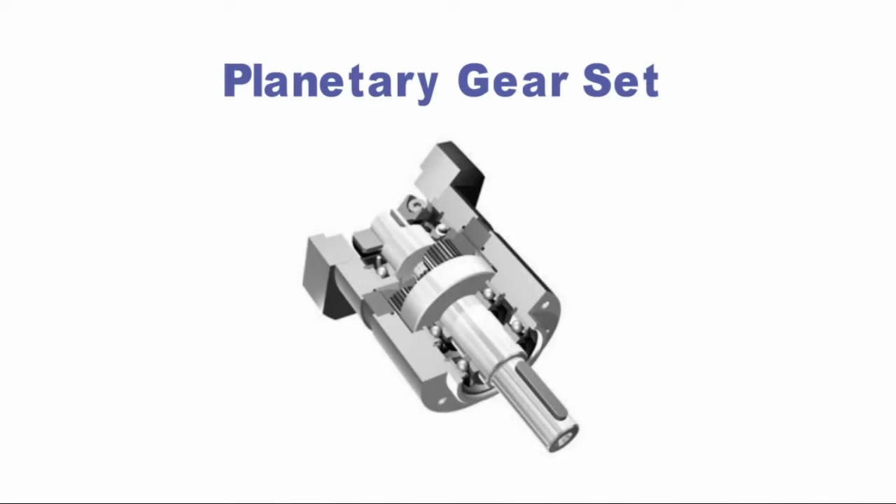Planetary gearing, with its inherent inline shafting and cylindrical casing, is often recognized as the compact alternative to standard pinion and gear reducers. Being suited for a wide range of applications, from electric screwdrivers to bulldozer powertrains, these units are strong contenders when space and weight versus reduction and torque are chief concerns.

The arrangement. The most basic form of planetary gearing involves 3 sets of gears, with different degrees of freedom. Planet gears rotate around axes that revolve around a sun gear, which spins in place. A ring gear binds the planets on the outside, and is completely fixed.

The concentricity of the planet grouping with the sun and ring gears means that the torque carries through a straight line. Many powertrains are comfortable lined up straight, and the absence of offset shafts not only decreases space, it eliminates the need to redirect the power or relocate other components.

In a simple planetary setup, input power turns the sun gear at high speed. The planets, spaced around the central axis of rotation, mesh with the sun as well as the fixed ring gear, so they are forced to orbit as they roll. All the planets are mounted to a single rotating member, called a cage, arm, or carrier. As the planet carrier turns, it delivers low speed, high torque output.

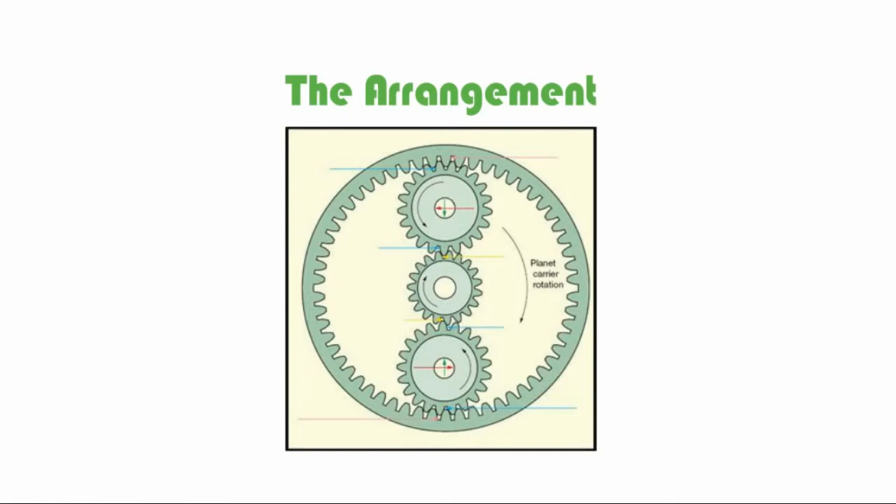Planetary gearing. Planet gears, for their size, engage a lot of teeth as they circle the sun gear; therefore, they can easily accommodate numerous turns of the driver for each output shaft revolution. To perform a comparable reduction between a standard pinion and gear, a sizable gear will need to mesh with a rather small pinion.

Simple planetary gears generally offer reductions as high as 10:1. Compound planetary systems, which are far more elaborate than the simple versions, can provide reductions many times higher. There are obvious ways to further reduce speed, such as connecting planetary stages in series. The rotational output of the first stage is linked to the input of the next, and the multiple of the individual ratios represents the final reduction.

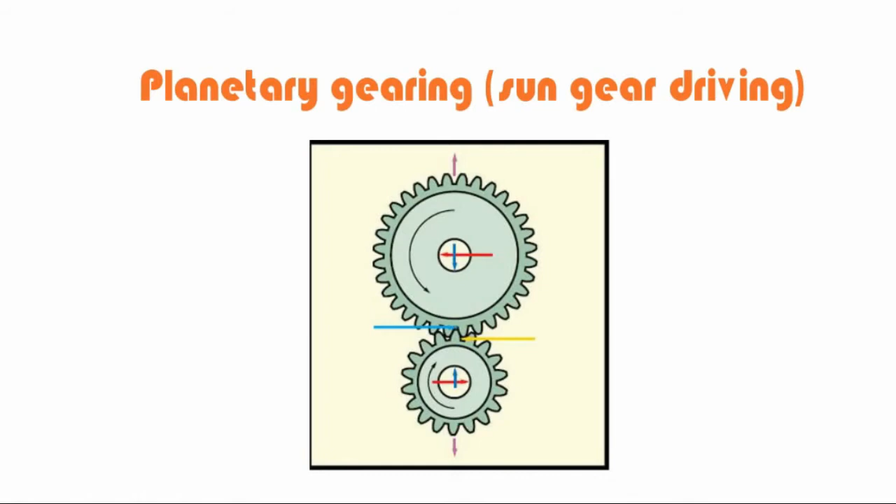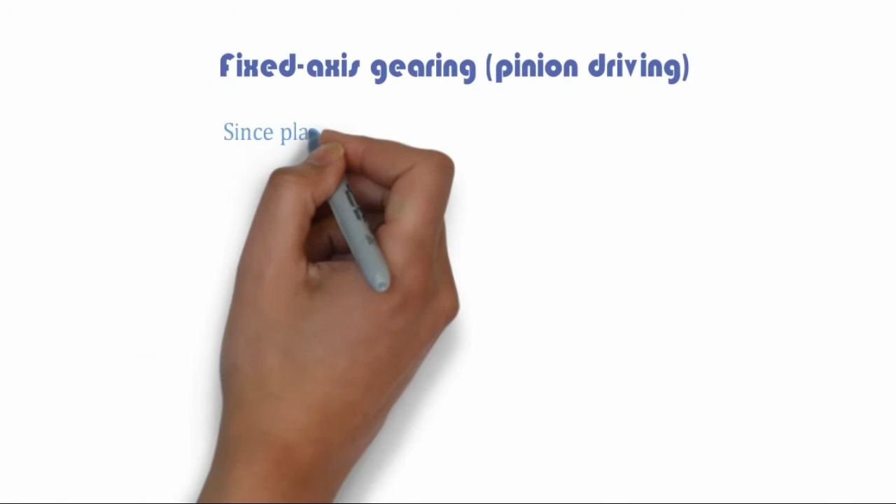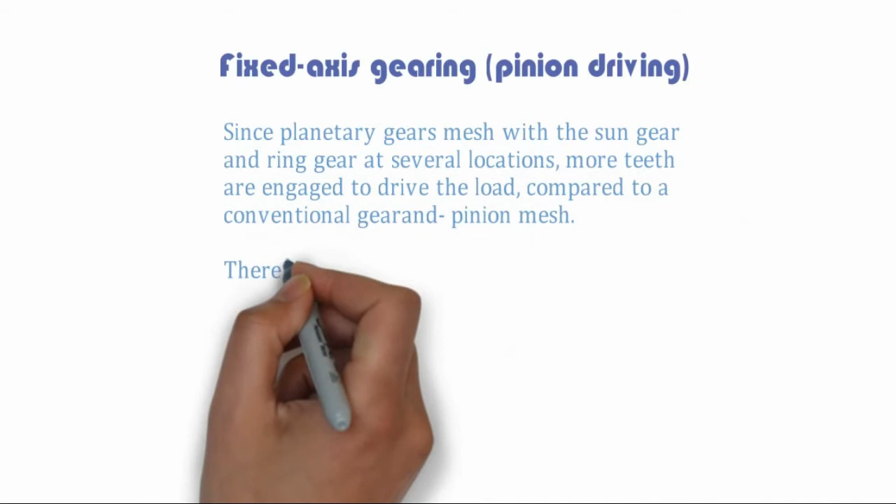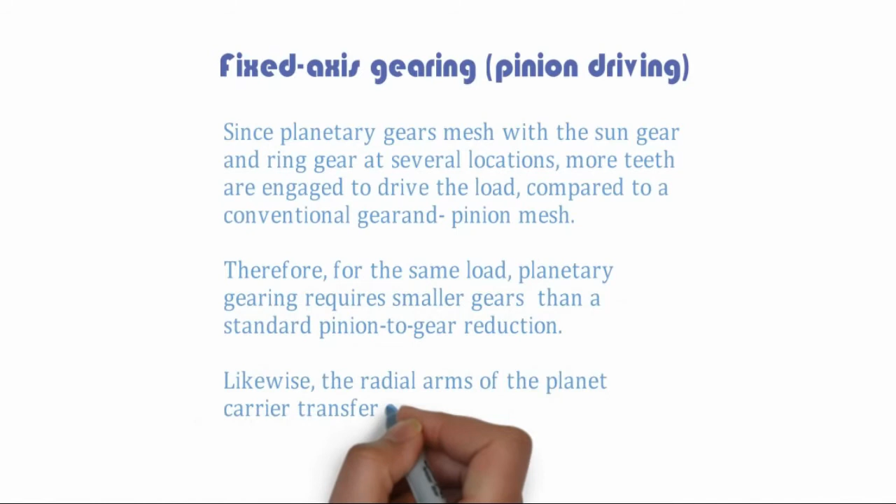Fixed axis gearing, pinion driving. Since planetary gears mesh with the sun gear and ring gear at several locations, more teeth are engaged to drive the load, compared to a conventional gear and pinion mesh. Therefore, for the same load, planetary gearing requires smaller gears than a standard pinion-to-gear reduction. Likewise, the radial arms of the planet carrier transfer substantial moment to the output shaft, another illustration of the efficiency of a concentric arrangement.

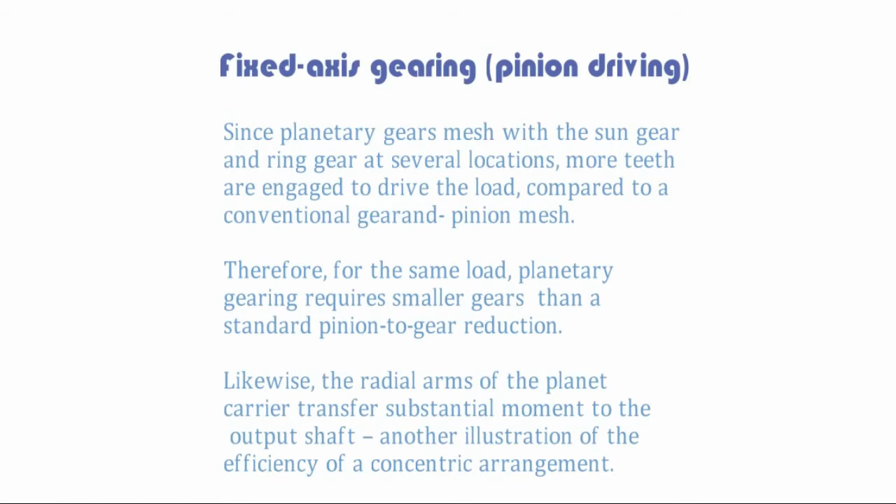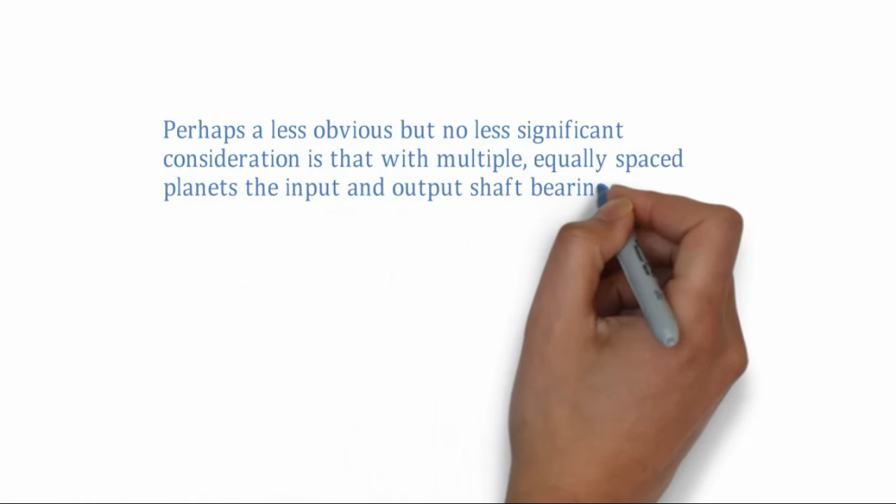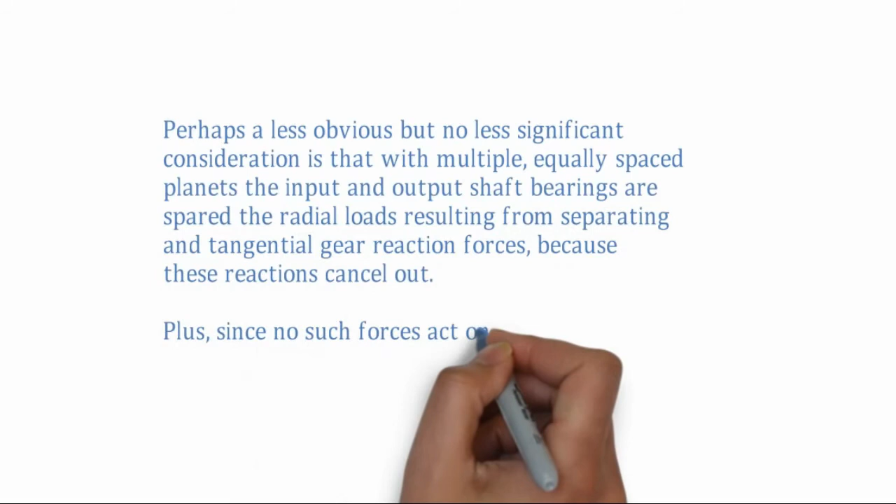Perhaps a less obvious, but no less significant consideration is that with multiple, equally spaced planets, the input and output shaft bearings are spared the radial loads resulting from separating and tangential gear reaction forces, because these reactions cancel out. Plus, since no such forces act on these bearings, there is less potential for distortion of the outer casing.

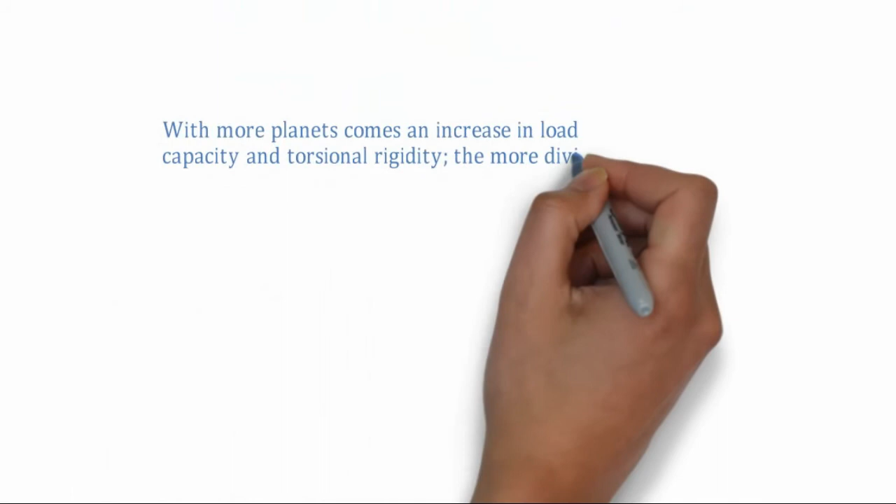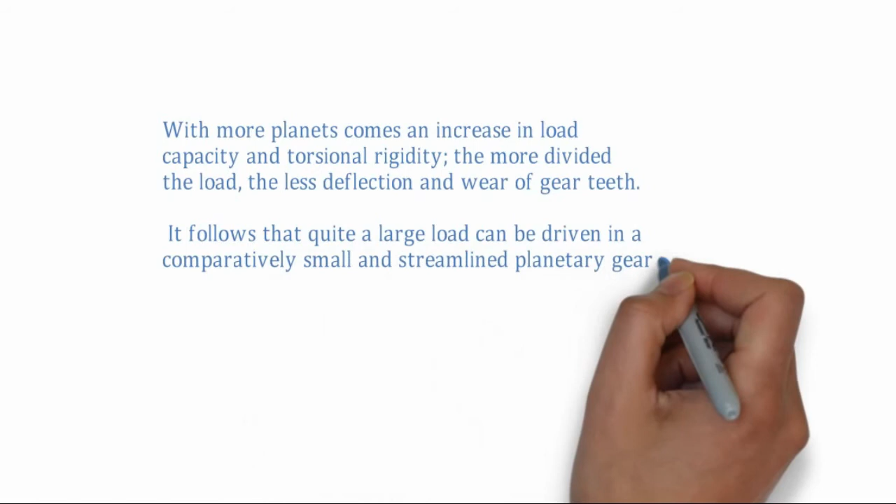With more planets comes an increase in load capacity and torsional rigidity. The more divided the load, the less deflection and wear of gear teeth. It follows that quite a large load can be driven in a comparatively small and streamlined planetary gear unit. 3 is typical for the number of planets, but there are often more, and sometimes less. Again, it is common for multiple planets to be equally spaced.

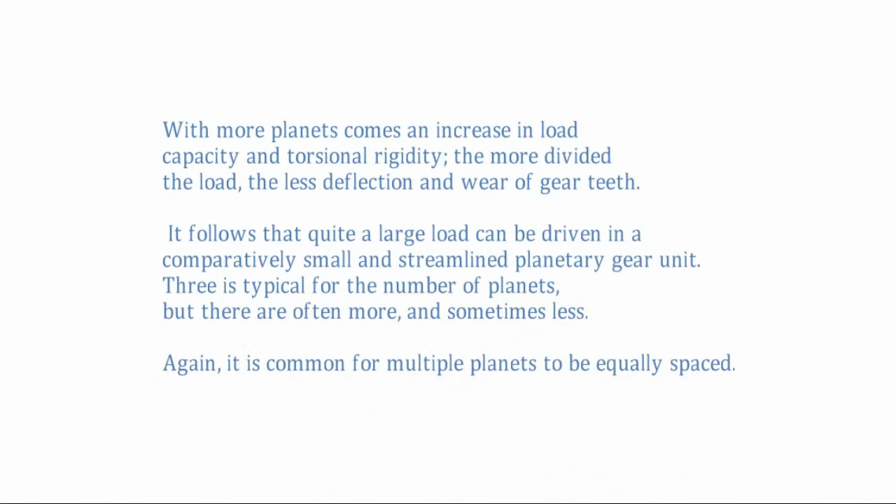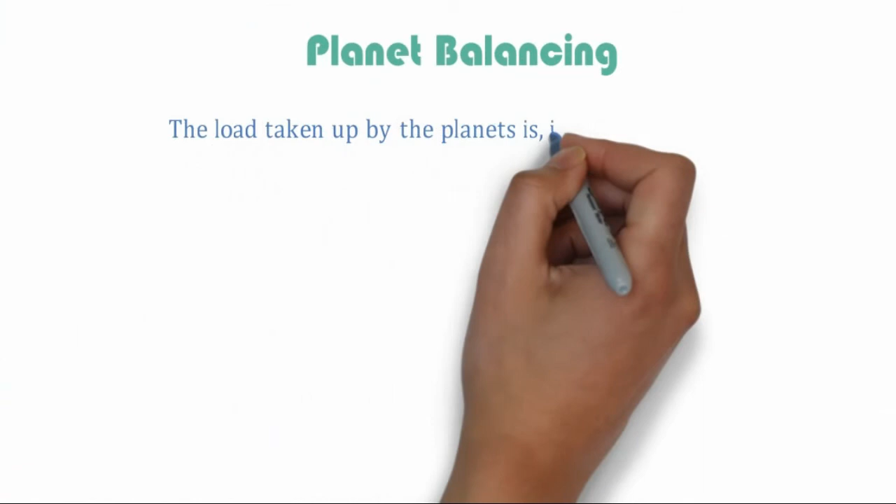Planet balancing. The load taken up by the planets is, in real situations, not perfectly balanced. One planet might by chance end up radially closer or further than the others from the sun axis, or the axis of the carrier rotation might be slightly off. As the precision of manufacture goes down, and the number of planets goes up, the tendency for imbalance increases.

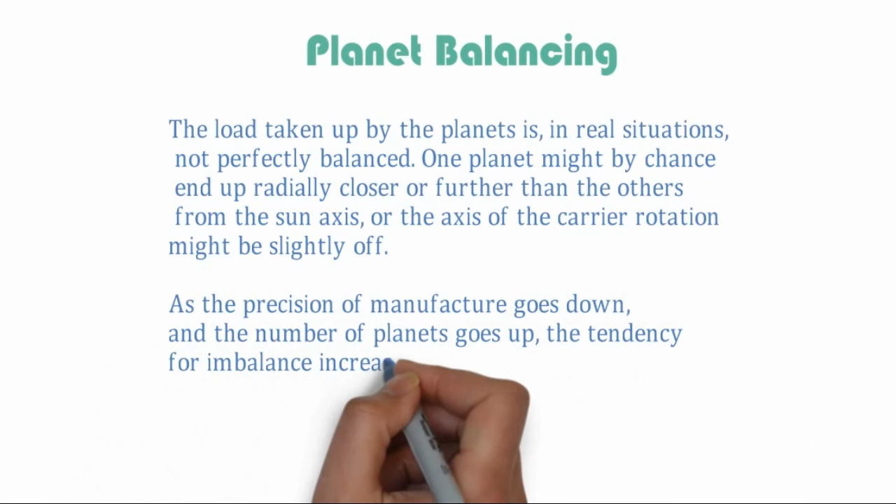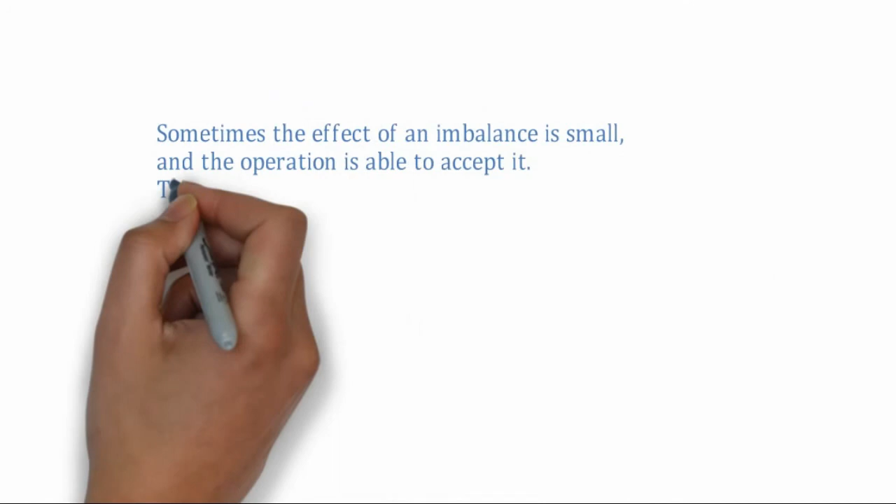Sometimes the effect of an imbalance is small, and the operation is able to accept it. The planets might even wear in and gradually engage the load more evenly. But some designs will be sensitive even to slight imbalances, and may require high-precision components and assemblies. Pinpointing the proper locations of planet pins around the axis of the sun gear could be the key.

Noise. In planetaries, noise is usually no worse, and often better than standard gear and pinion reducers. Having smaller gears means a lower pitch line velocity than a comparably rated pinion and gear set. However, having a lot of identical planet teeth engaging at the same frequency with each input shaft revolution contributes to noise, especially at very high speeds.

And the fact that these meshes occur in a circular orbit can make the situation more complex. Obviously, using spur gears of reasonably high quality couldn't hurt. But helical gears, with their gradual rather than instantaneous tooth engagement, might be better for some operations.

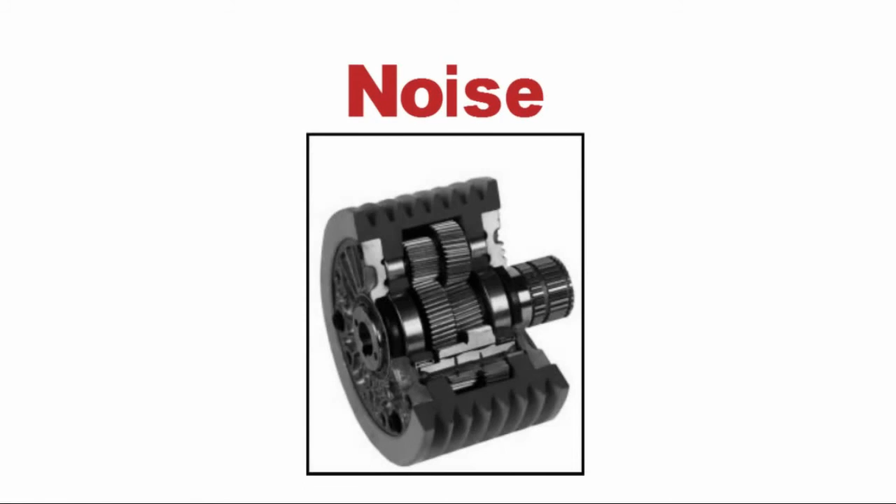Heat. A planetary gear train running at very high speeds and continuous duty is apt to generate enough heat to justify cooling. With ordinary gear and pinion systems, the load often requires quite a large chunk of gearing and surface area, which amounts to an appreciable heat sink.

The compactness of planetary units can limit the rate of heat dissipation, and therefore additional measures are sometimes taken. The lubricant may be circulated through a heat exchanger, or a cooling fan is employed. If the operation is continuous, the system has less opportunity to cool than if it runs intermittently, and without sufficient cooling, the speed allowance might need to be lowered. Or, as mentioned, other kinds of speed reducers can be attached ahead of the planetary reducer, although this is an added encumbrance.